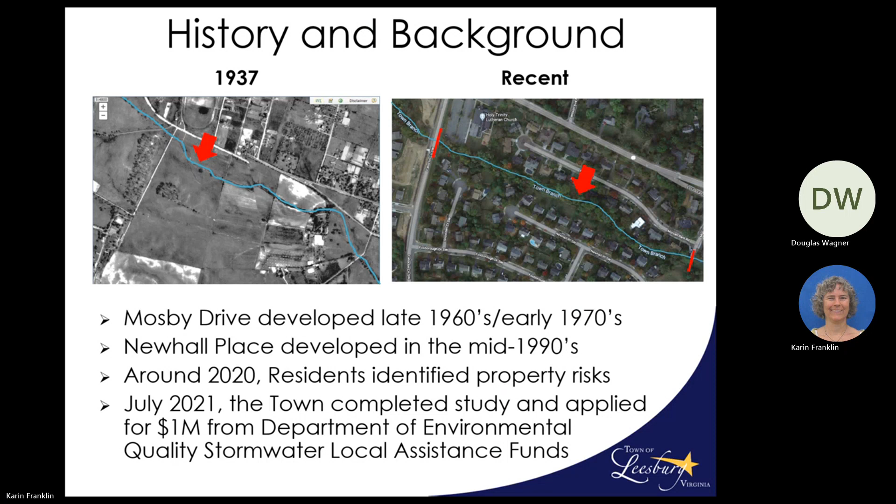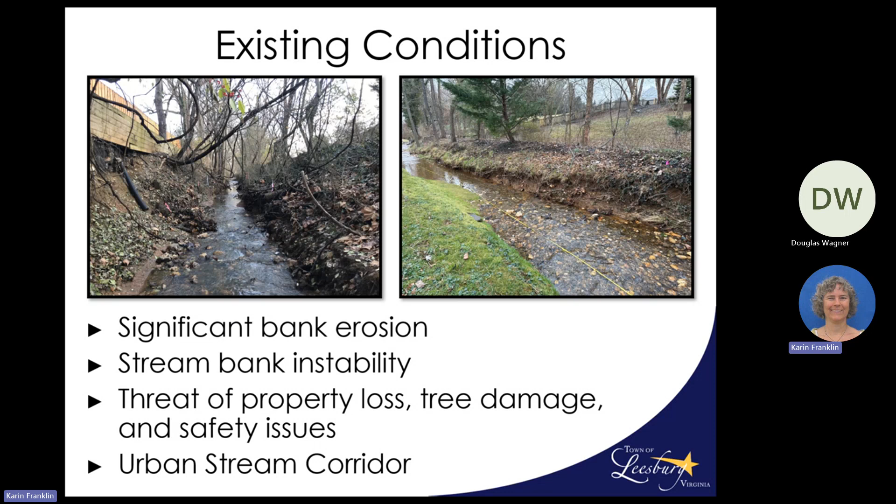I want to talk a little bit about the existing conditions along the stream. You guys know what it looks like right behind your house, but you might not know what it looks like in other areas. It's not the same across the whole stream, but in general we have significant bank erosion, a lot of stream bank instability, threat to property loss, tree damage, and safety issues. But it is an urban stream corridor, and we're going to talk about that in the next slide.

Urbanization has changed the overall drainage areas that feed Town Branch, and with the increase in intensity and frequency of large storms, we are observing an acceleration of the channel evolution process.

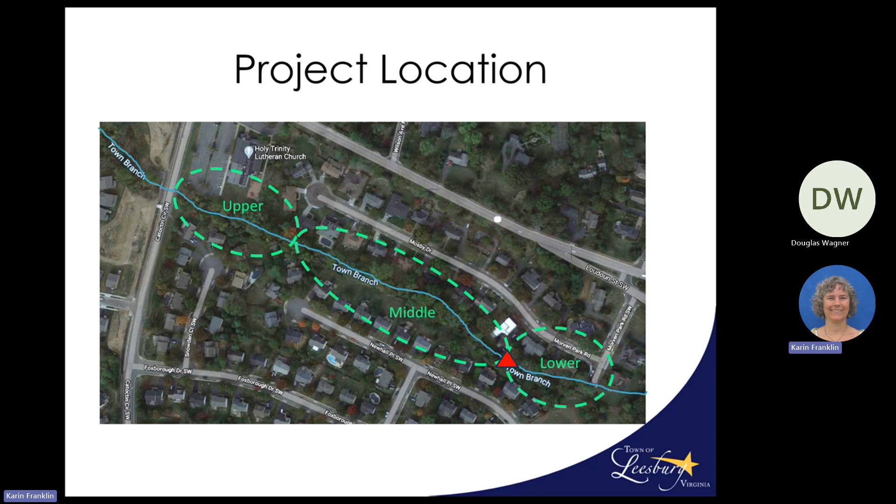Right now, we see the stream in stage 2, stage 3, and stage 4 stages, and we'll talk about which stages those are happening. So in the upper section...

In the middle section, it's in the process of widening. So we have these really steep banks already. And now trees are starting to fall in, the soil is starting to fall in and wash away. So we're starting to see that part of the stream widen.

In the lower section, we do have some riprap and gabions, along with some berms. Those are considered stream stabilization elements and are easier and less expensive to install, but are a more temporary option and don't bring the stream to the stable state we desire on the channel evolution slide that we looked at before.

In this case, the previously installed gabions and berms are causing water to flow behind the berm, and the water cannot return to the stream until close to Morven Park Road. This project is a stream restoration project intended to be a more permanent solution to bring the stream to a stable state again, that's stage 5 on the channel evolution.

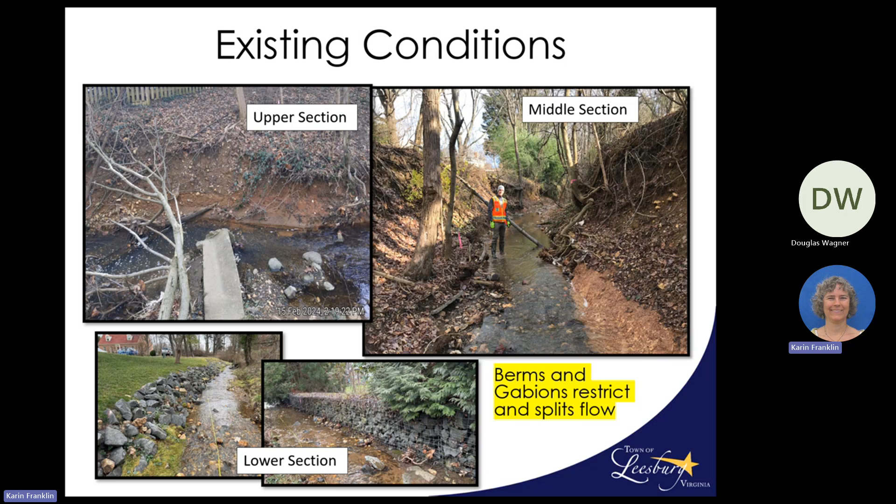We do have some existing easements along the Town Branch corridor. On the Mosby Drive side, we have a 25 to 30 foot storm drainage easement along the backs of the properties. On the Newhall Place side, we have a variable width 25-year and 100-year floodplain easements, and again, those start from the back of the property lines.

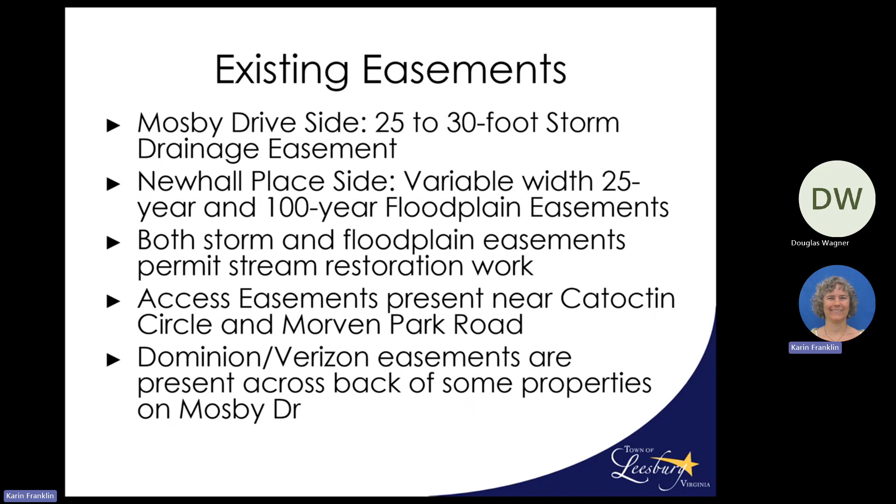Both storm and floodplain easements do permit stream restoration work. We also have some access easements near Catoctin Circle and Morven Park Road, so on each end, plus we can gain access from Newhall Place next to the storm pond. Dominion and Verizon do also have an easement across the back of some of the properties on Mosby Drive.

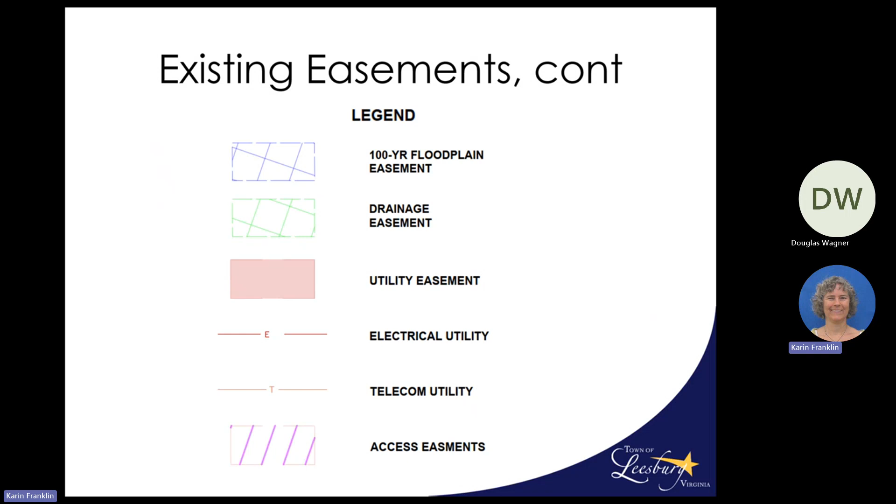So when you look at the plot over in the other room, you're going to see some of these symbols. The purple hatch is going to mean floodplain, green is going to mean a drainage easement. So when you get over there, this is kind of what the plot looks like. You can see that the purple hatching, that's a floodplain easement.

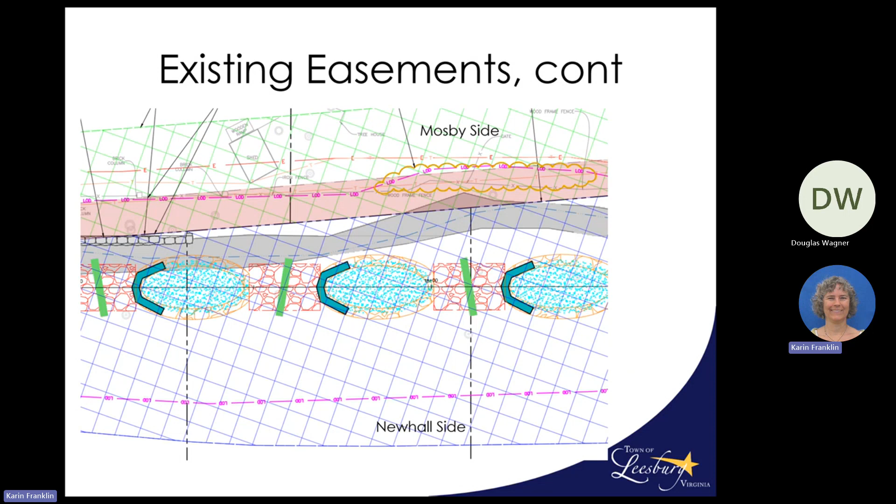And this shaded area would be the Dominion Verizon easement that I was talking about, so you'll be able to orient yourself to the plot when we get over there.

So what might happen without this project? We asked the engineer to conduct some modeling to help us understand what might happen if we don't do this project. They did this modeling over a 30-year period. The modeling is variable, so we had data from 10 years ago plus the data we collected for this project, and we used that to calibrate the model because we could see how the stream had degraded in that 10-year period, so we could determine what the model is telling us.

So the modeling period is variable. What we mean by that is even just since the study was performed in 2021, the engineers have seen significant changes to the stream. It's getting deeper in the upstream area, and wider and filling in on the lower side. The stream is dynamic and is changing rapidly, so even though we say it's a 30-year period, some of this might happen sooner, and some might take 30 years to happen.

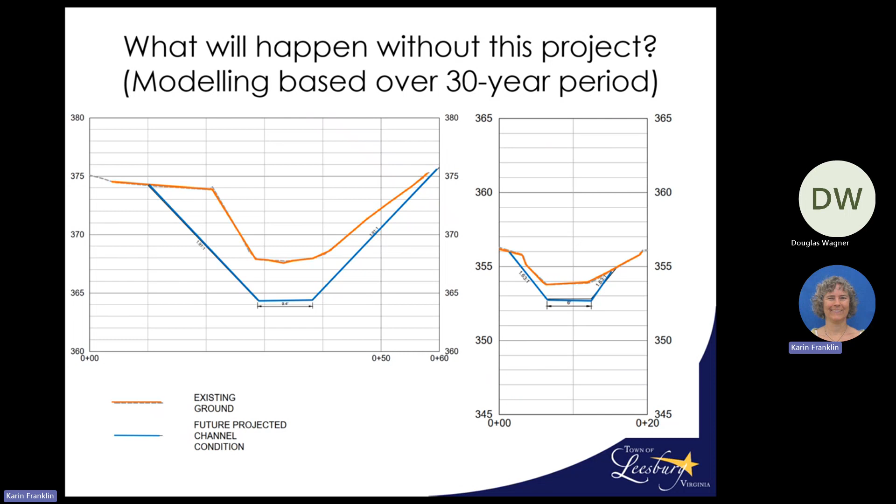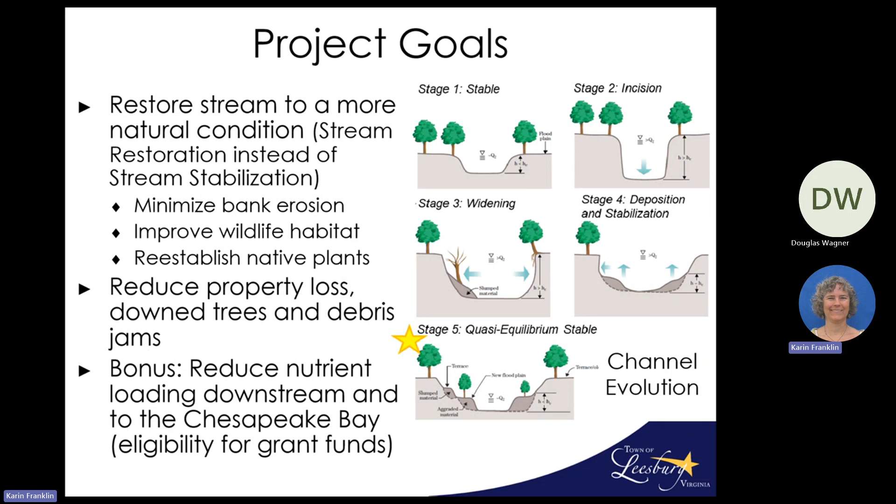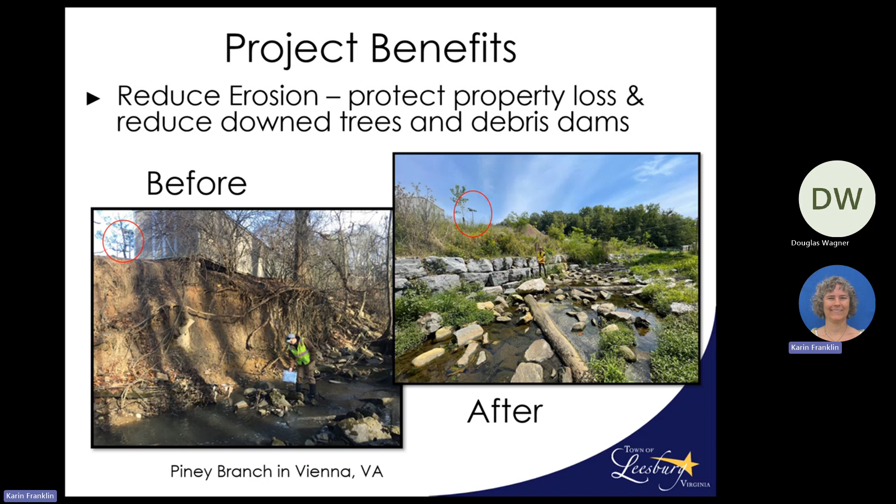So what are some of the benefits? We talked about reduced erosion. These are before and after shots from other stream restoration projects our engineers have worked on. You can see this looks pretty similar to some areas on Town Branch, but now they've put this imbricated wall in—we're going to see that in some sections on Town Branch to help with that situation. Look at the difference, it doesn't even look the same.

So we're going to protect property and reduce that loss of trees. Here's another one where we're going to generate more gradual slopes down to the stream. You can see here they were very steep, and afterwards we have the more gradual slopes down to the stream.

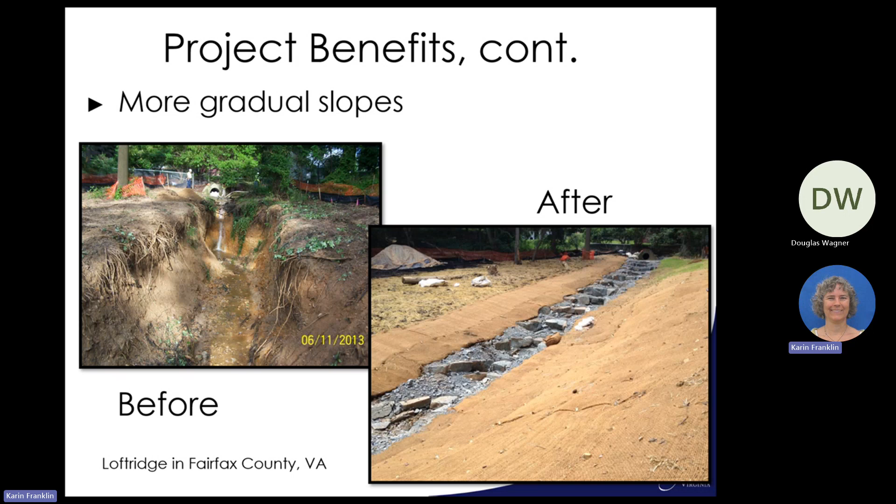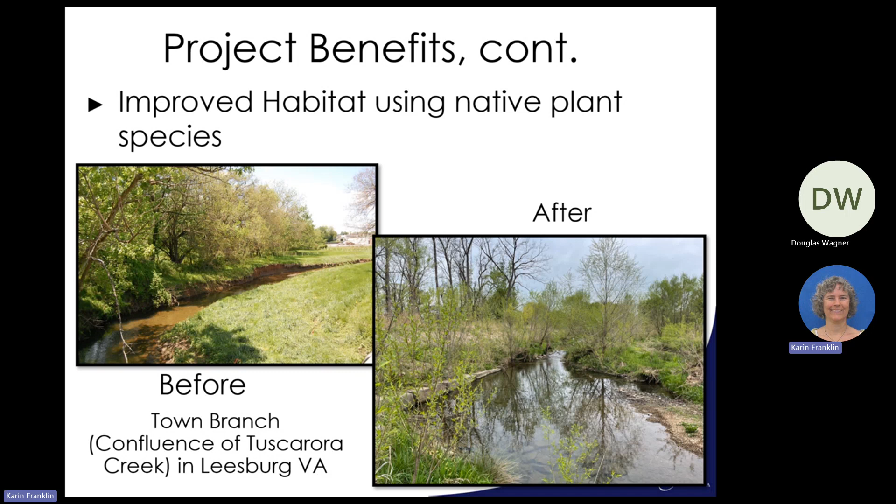We're going to see improved habitat using native species. This is actually in town, at the confluence with Tuscarora, and it was eroding pretty badly, and now it's not. That looks like a pretty good wildlife habitat area.

All the disturbed areas will be replanted. This picture, from 2020 to 2023, shows the Tuscarora Stream Restoration Project here in Leesburg. It's a big difference in how the plants look—they do grow fairly quickly.

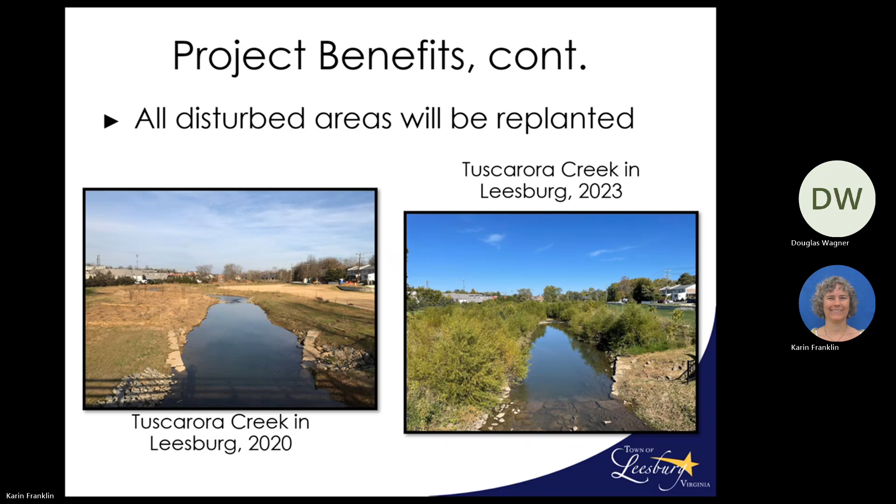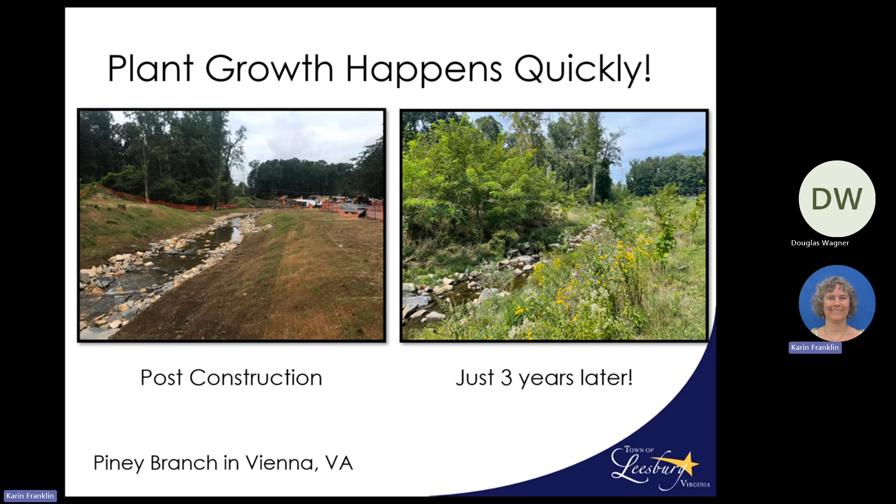And this is another picture, different, not in town, where right after the project and just 3 years later it's a very different picture. So the plant growth does come back fairly quickly.

So some of the challenges on this project: we have many stakeholders—every one of you is a stakeholder. We need to try to balance at-risk property needs while minimizing grading and property impacts. That's a high order; we're balancing as best we can everybody's different needs.

Existing private property and trees located within the storm easements and project area will require removal. We have to do a lot of grading to put in the design elements I'm going to talk about in a couple minutes. The only way we can do that is trees come out.

But it's within the storm drainage easements that we have already. More time was needed to get to this point, and we really appreciate your patience as we work through some of these things.

We had to postpone a meeting with DEQ due to an injury they had. They couldn't walk the corridor with us. We did additional review to develop the concept plan that we're showing you today.

And this is just a concept plan. We haven't done the detailed engineering yet, but we had to go through several iterations to try to meet this balance as best we could.

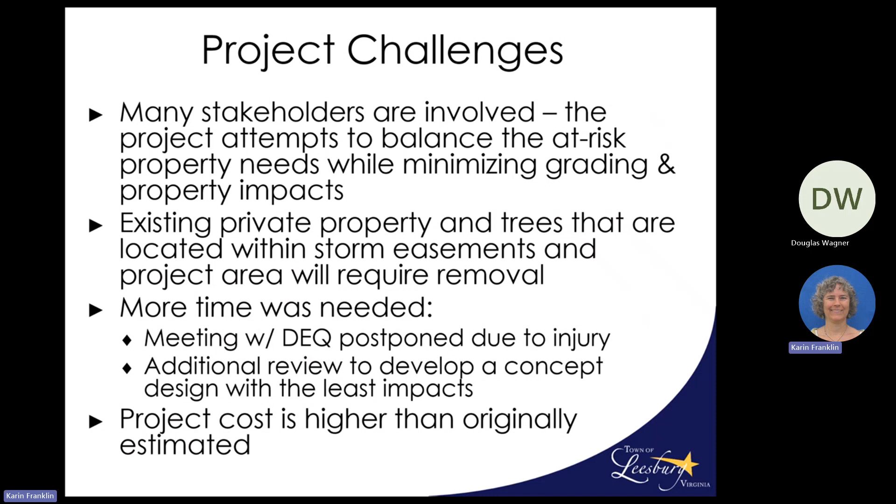The project cost is coming up higher than we originally estimated, so we are pursuing some additional funding sources.

We found some underground electric and phone lines within the project area that may require relocation. New easements may be needed for that. We don't know that yet. We're initiating discussions with them, so we'll know more as we move forward.

During construction, we're going to be working around existing storm and sanitary facilities. We have a challenging construction access. Remember, I told you we have access at both ends. We've got to get the equipment across there.

It's my phone. You flip it over just so it's laying flat. Sorry about that, guys.

So I was talking about the narrow corridor. We've got a narrow corridor and we're trying to get the equipment back and forth along that corridor.

Construction timing and tree removal may also be impacted by the Endangered Species Act. For those who may not be aware, the long-eared bat has been added to the Endangered Species Act, and Virginia is one of their potential habitat areas.

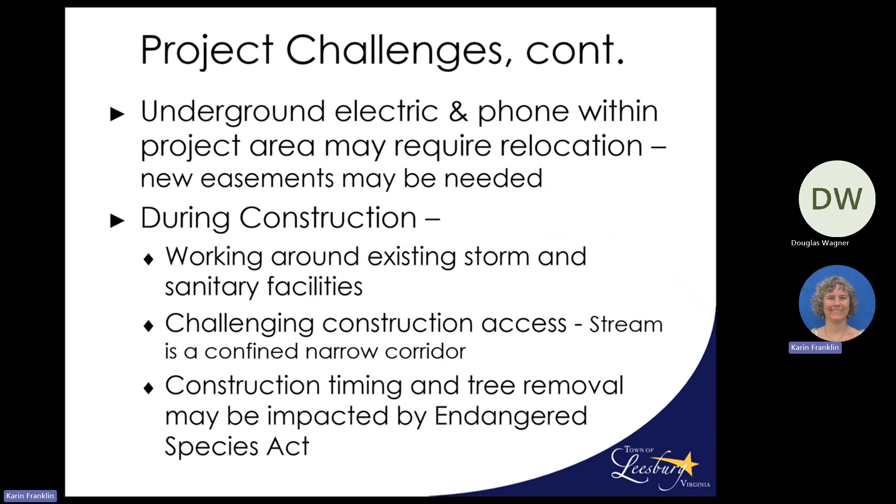So we've got to do more research to understand if we have bats in the area, and that may impact when we can remove or cut down trees. The act requires you to cut down trees in the wintertime when they have migrated south.

So here are the milestones we've completed to date. In July of 2021, we completed the study and applied for the grants. In December, we received notice that we had received that grant, which allowed us to move this project up in the CIP.

Some of you were involved with talking to council to get this moved up, and one of the things we needed was the funding to be able to do that. So that happened, and we put it in the CIP to start in the summer of 2022.

In July, we started the design work and completed the field work that fall. In the spring of 2023, the engineer supplied the initial preliminary concept plan, which we started reviewing and adjusting. In summer, the engineers gave us a reworked concept plan.

In October, we were finally able to meet with DEQ, and we had our initial preliminary floodplain analysis submitted from the engineer. The purpose of that is to make sure the project isn't increasing water levels during rain events. That's pretty important also. So then we did some more reworking on the concept plan.

So it's kind of an iterative process at this point to get to the concept plan you're seeing. In the winter, we also had to do some additional survey work, and you guys might have gotten a notice on that if you're on the Mosby side.

We had to go out there and do some additional surveying work and get the utilities to locate those lines so we could make sure they were on the plan properly and determine if they really are in conflict or not. And then in May, here we are, presenting our revised concept plan to you and getting your input.

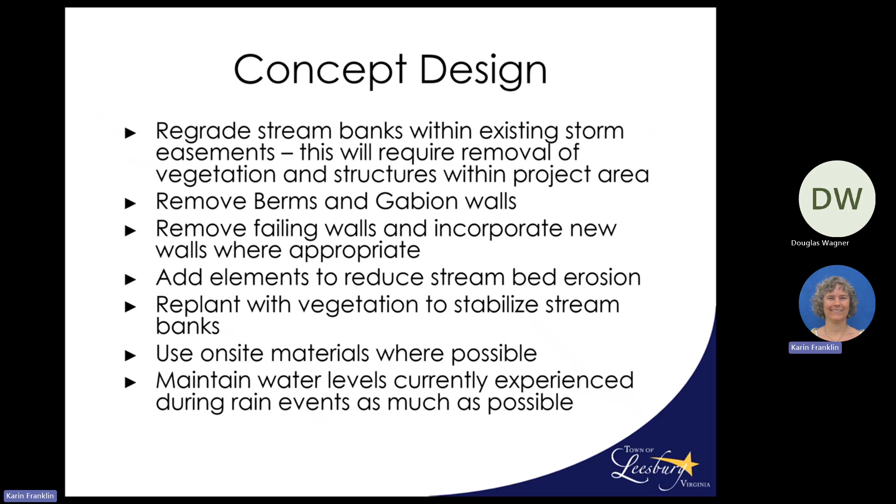So what are some of the stream restoration elements? We've got elements that we're going to use to reduce the energy and velocity of the stream, because it's the fast velocity that causes the erosion. So these elements are all intended to help reduce the energy and velocity of the stream so that we can reduce the erosion to the banks.

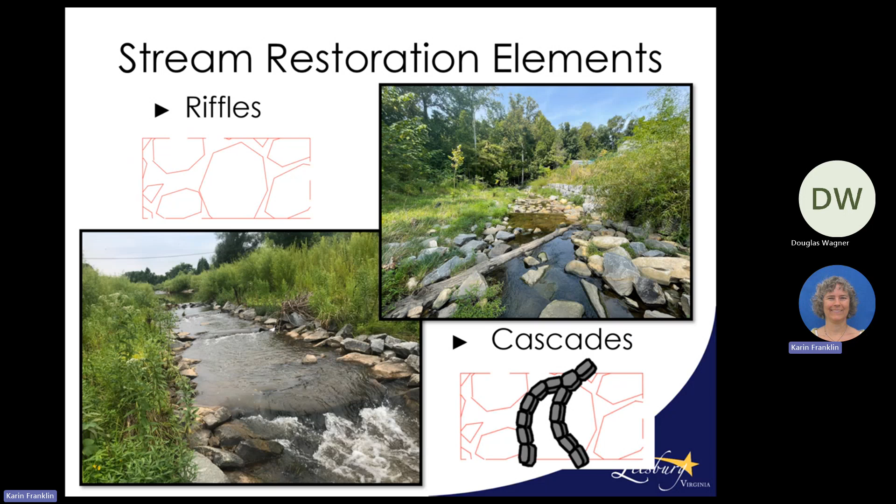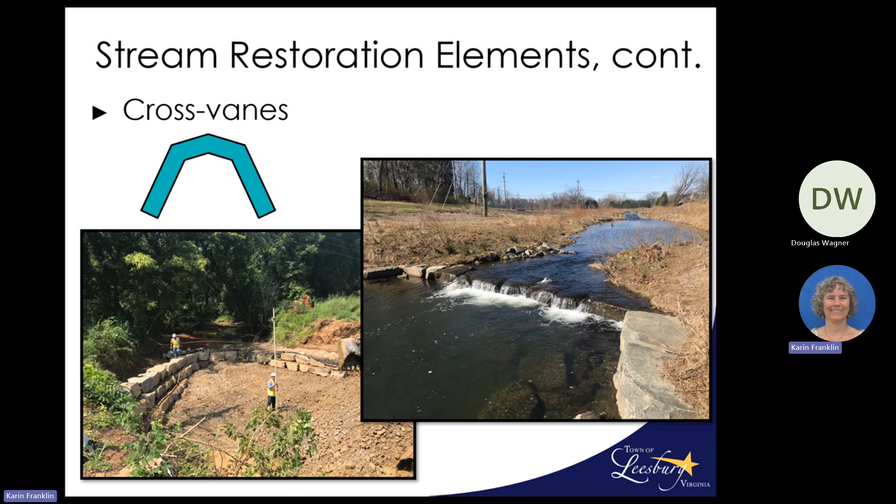So we're looking at cascades and riffles. We're putting in pools, which helps to calm the water and slow it down. We're talking about adding cross-vanes. This is what one looks like before the water is added. It centers the water to the middle of the stream, gets it away from the banks. When the water's running right down the bank, it tends to erode the bank, so these cross-vanes help to center the water down the middle of the stream.

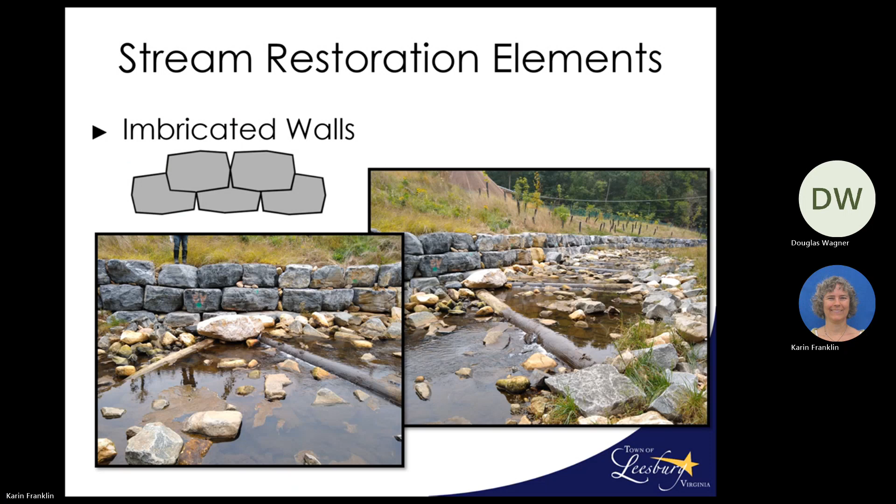The imbricated walls, where I said we might be replacing some walls, where we have limited space both vertically and horizontally, which happens in some places on the stream, we are going to be adding some imbricated walls. We're going to add natural on-site materials and use that wherever possible. So some of the trees that might have to come down might get incorporated into the stream restoration, and rocks that we find are going to get incorporated as well.

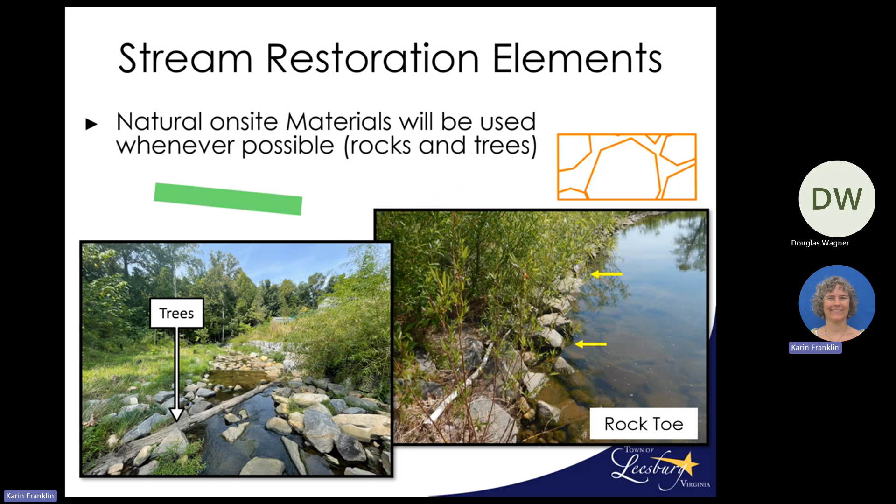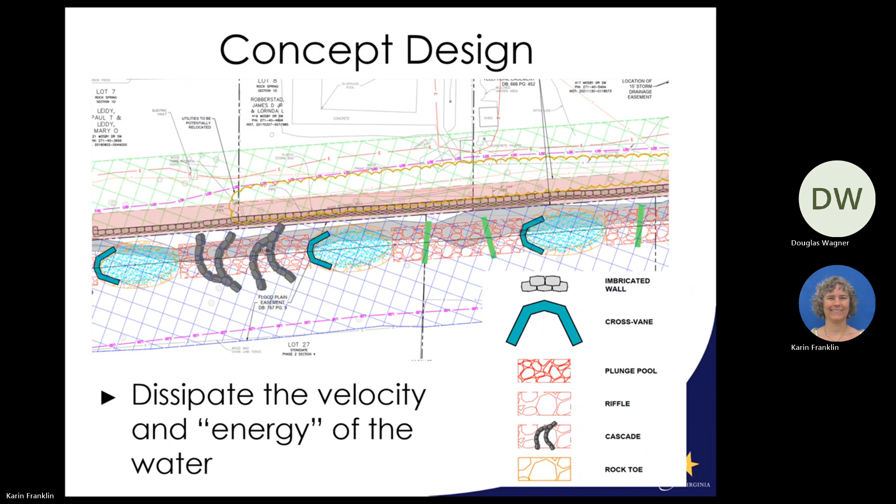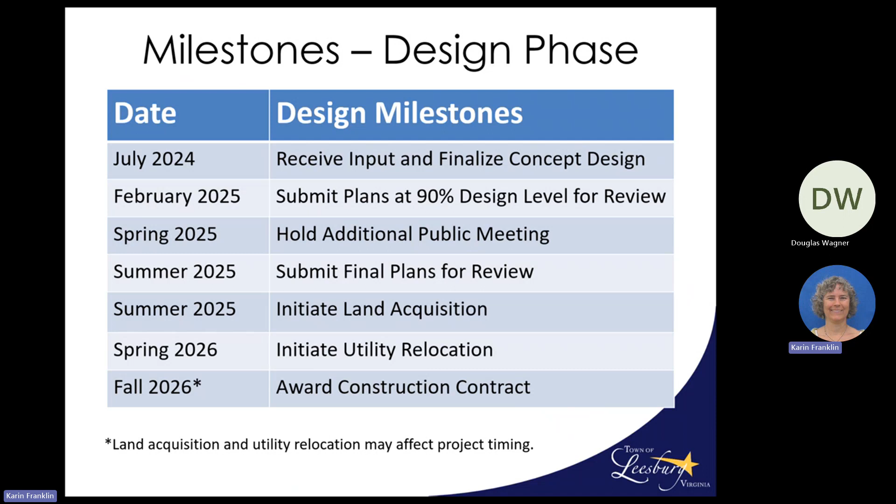So in closing, I just want to say stream restoration works. You get more gradual banks, you can see reduced erosion, and we improve the wildlife. Bonus, we improve the water quality to the Chesapeake Bay, so the crabs are happy.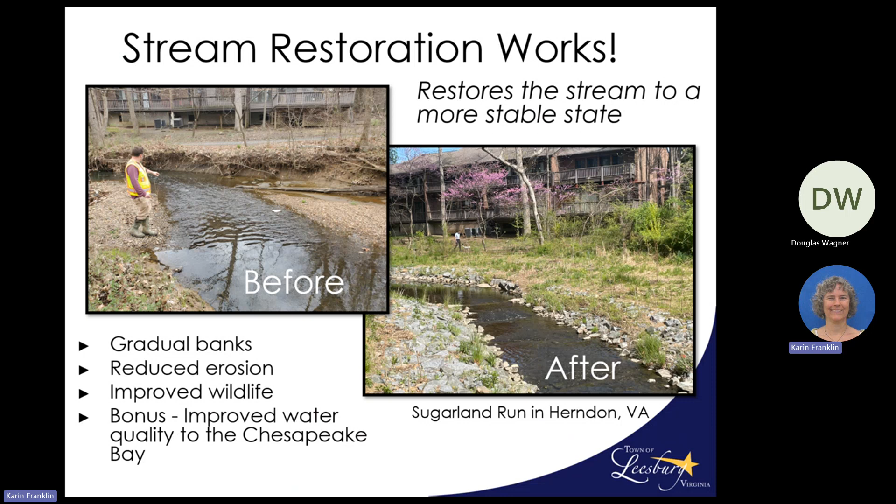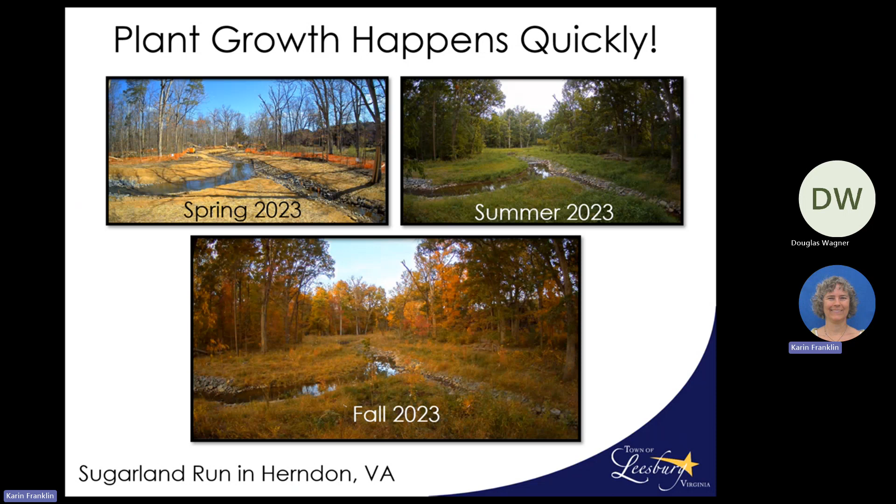Here's another before and after shot. Actually, this one was getting very close to their trail, so they moved it further away from the trail. Plant growth does happen quickly. These are three pictures from the same season, beginning to the end of the season. I think it's a marked difference just in one season, but also in just three years you can see a major difference in the plant areas.